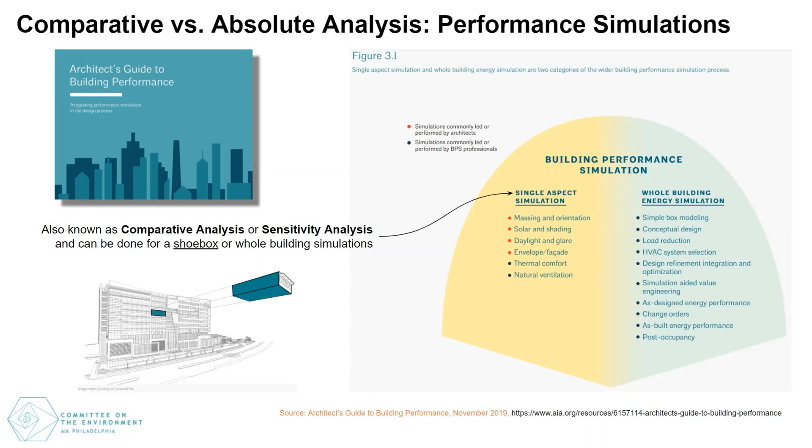So again, this is our charge as architects to implement these lessons. So, getting into and setting up the presentations for tonight, we did talk in our early sessions this year about the difference between comparative and absolute analyses, the types of simulations that you're going to look at early in a project: climate insight, programming, benchmarking, how you can ask those questions up front.

And then as you start to get into developing your design, using these tools to go through iterative studies. We'll see some examples of those tonight as well. And even before systems are selected, and then as systems are selected, kind of integrating the whole building together, determining your load, determining the impact of all of your early design decisions on setting those loads.

And then finally, as we're going to focus on more next month, verifying the as-designed performance as you get to the later phases of the project, as you get to perhaps submitting your LEED energy model, those types of exercises. So we talked amongst our group about the questions we wanted to ask in these presentations. What questions are you asking as a designer, and when is the right time to ask them?

How do you identify the parameters that are going to be most impactful to your project? Maybe there's some obvious contenders. And then as we get into the outputs of these studies, what does that data tell us? How do we use it to make design decisions? And again, in the comparative frame of reference, we're looking at how those decisions create differences between the schemes. Not so much what the exact number output is, but what the relative conclusions are from those comparative studies.

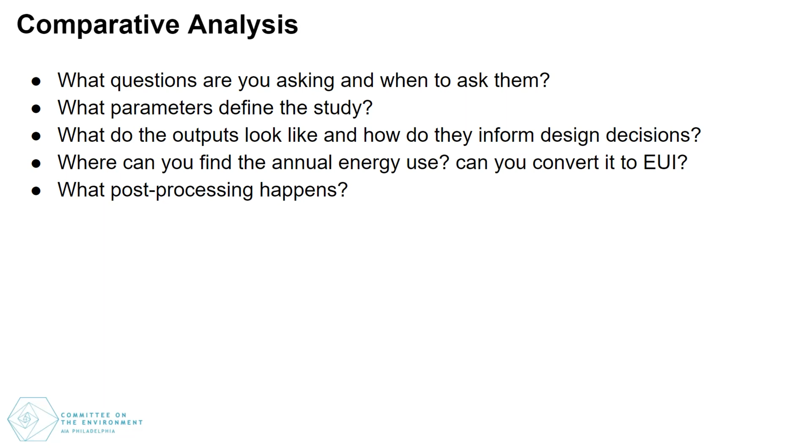And then as we get into the more developed schemes, how do we evaluate the energy use, look at reporting to the 2030 Commitment to the DDx, and evaluating this data at the end of the process. So that leads us into our presentations, and we asked around, and we had a couple of our members who were interested in presenting different tools. We have Sherman Aronson, who's a regular member of our committee, who is going to be presenting some of VLTA's earlier cove.tool evaluations.

How that tool can be used to ask some of these questions, make some of these decisions. We have Daniel Overby, who's joining us from Browning Day, who's going to give a demonstration on Sefaira, how these kinds of investigations can be pursued, and then Apoorv Goyal, who's also been a regular member of our group this year and contributed to a couple of our presentations, and he's going to be doing the same on Climate Studio. So I think a good range of tools, a good range of approaches, and with that, I'm going to go ahead and get into the talks.

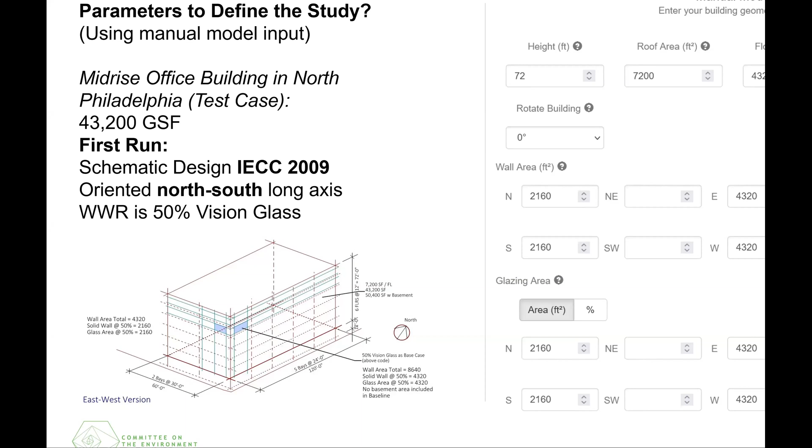And Sherman, I will pitch it to you if you are ready to share. You're muted there. Okay, yeah, let me share screen. I'm going to stop. Oh, okay, I will do that again. Let me put it on full screen. There we are. Okay, that looks a little big on here. It seems to fill up a little too much there. Well, can you see the whole image? Yes. So that's better.

Yes, we learned about cove.tool at one of these sessions earlier this year and late last year, and for a long time at VLTA, we've tried to use various kinds of plugins, Green Building Studio for a while with Revit. We got way too much information and variables from that, and it was hard to pick and choose. We tried eQuest, and we could get through a little bit of it, but not all that far. So this summer we decided, after some experimenting, to get a few licenses with cove.tool and see if we can use it for energy and for the other aspects of green design that are built into it.

So I'm going to show three very brief building types and building examples. This first one is a small, medium-sized office building. It's kind of imaginary for the cove.tool study, but it's based on a recent project we completed a few years ago. And the way to enter the information in this case was very simple.

I made a sort of hand drawing on Bluebeam of a volume of a building and assigned 50% glass areas, and made a rough sketch, and then put that data manually into the program. So in that sense, it's a little bit like ComCheck. It's just basic information on the envelope.

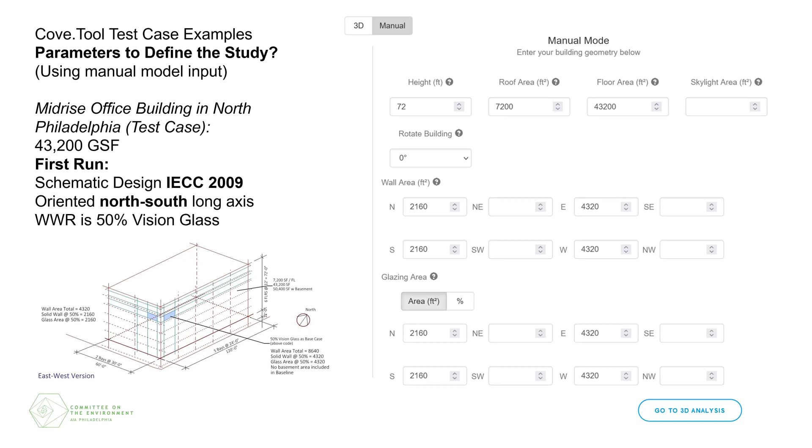And we chose the 2009 energy code, and we had it oriented east, so the long sides were east-west, actually, and it was 50% vision. But let's see what happens. And so the next slide, we get those questions asked. What is the projected energy use? How it's based on massing and orientation, window to wall ratio, the version of the code used,

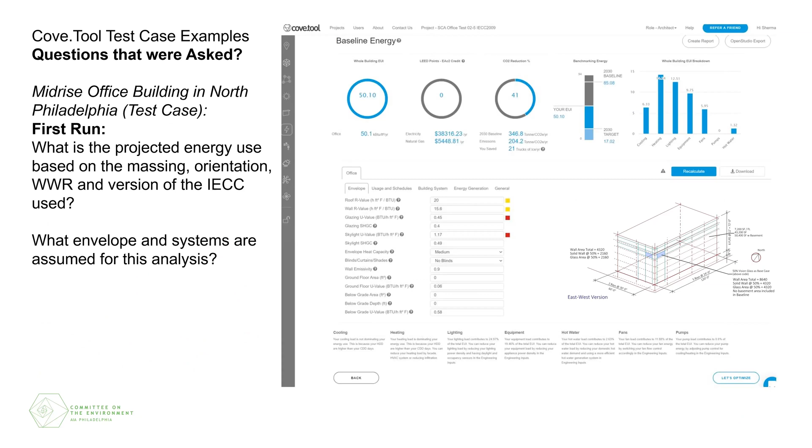and we got some answers. Baseline energy of 50, and it shows it's sort of mid-range between national average and the DDX targets, but that was very useful information. And it shows a report where you can read the output, you can interpret it, you can understand it pretty clearly. It does include the PEUI right away.

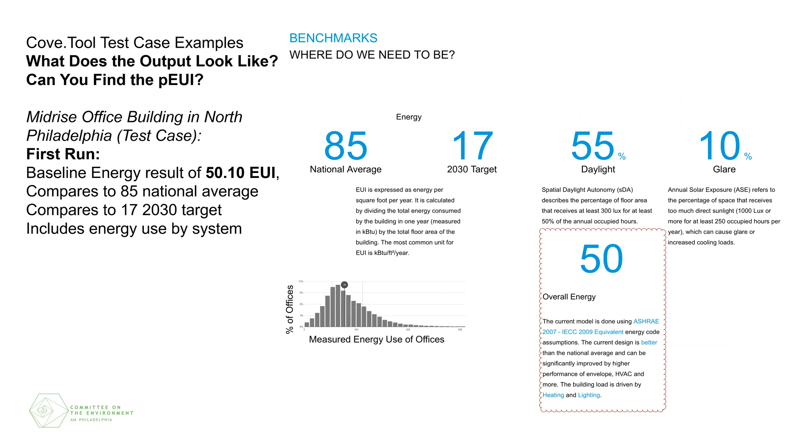So then we made a stab at adjusting that building design, making it so the long sides are facing north and south, reducing the window glass area to 40% on those sides and 20% on east and west. And we updated it to the 2018 code and ran it again.

And there we get a PEUI of 30, which is a dramatic improvement over the previous results. And it's about 67% less than the national average of 85. And if we were submitting this, we could use this data for DDx reporting. And you could read what the assumptions were for envelope and glazing.

So pretty much what it's working from is standard R values and U values that are built into complying with the code and glazing values. And that extrapolates a good deal of information from that. Also, systems, basic system assumptions. Any of those you can adjust and tweak and change.

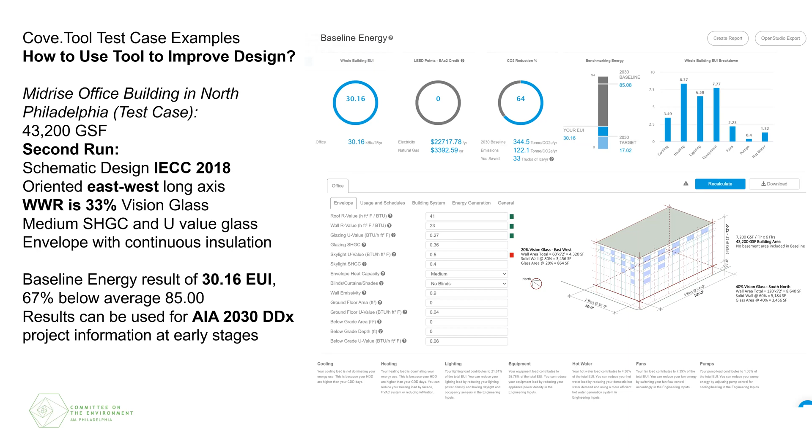So next step is optimizing. And it has a tool built in where we can ask the question, well, what are the design options that we could explore if we want to reduce it even further from the 30 PEUI? And there's a range of options which can be fine-tuned. If you select one of these bars, you can just say 100 tons of CO2, or you could adjust the range based on the cost premium or the payback.

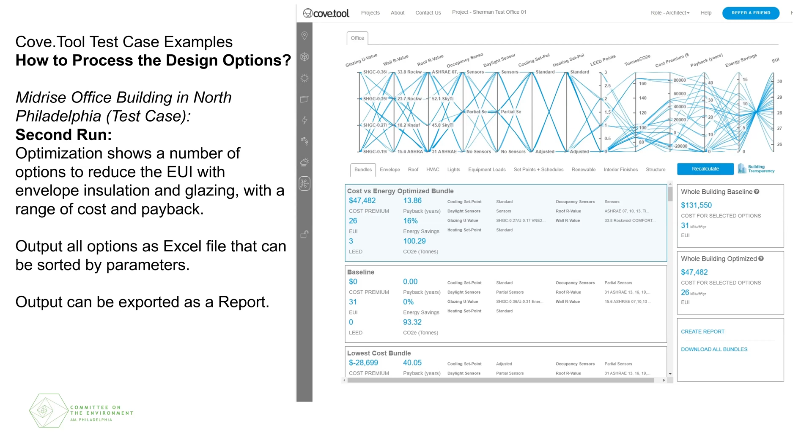So this provided a range graphically, this set of bundles, you can create a report, but we downloaded this as an Excel document. And then once it's in Excel, we can sort it by any of these parameters. So we decided to sort by steel framing, because we're not using wood framing, and look at what it proposes.

So here we went, it might be hard to read on your screen, but went from 31 in that bright yellow band down to 27.6. And one of the major changes is using improved glazing. We actually have a VNE number for a product, as well as adjustments to occupancy sensors, with very little additional construction cost. So this is a kind of tool that we can use during design to discuss with the engineers and the owners.

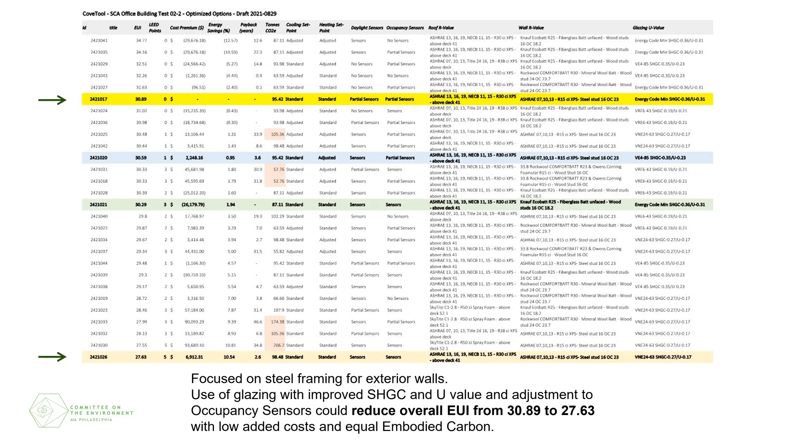It also provides graphic output on climate, sunlight, the psychrometric chart, radiation. That's based on the location. It's an output that varies with where you are and the type and size of building. So this is useful for other kinds of decision making.

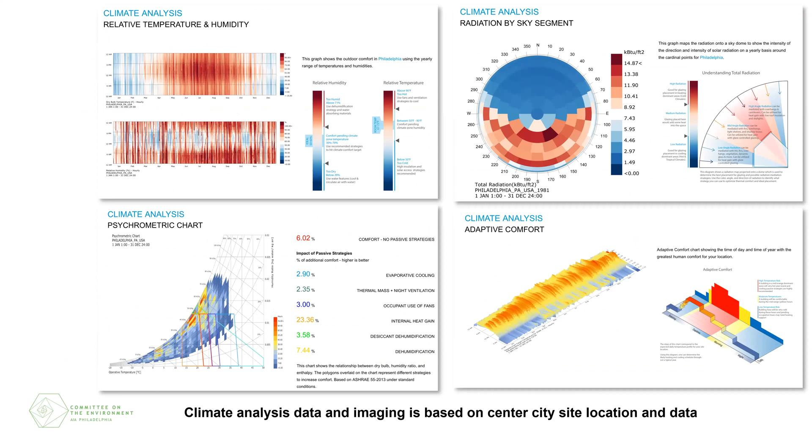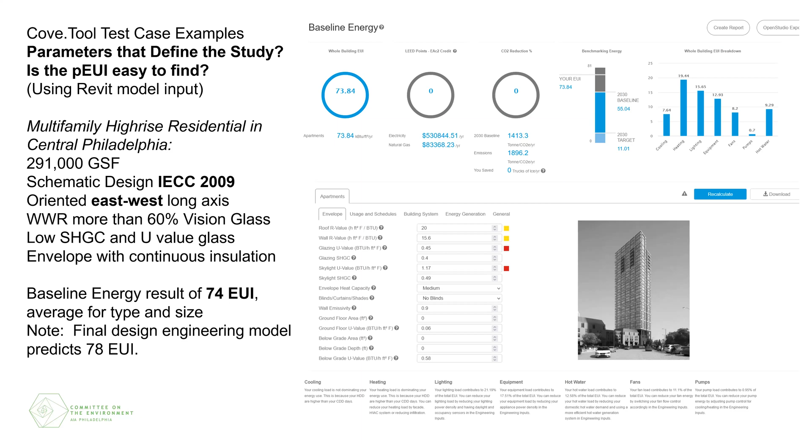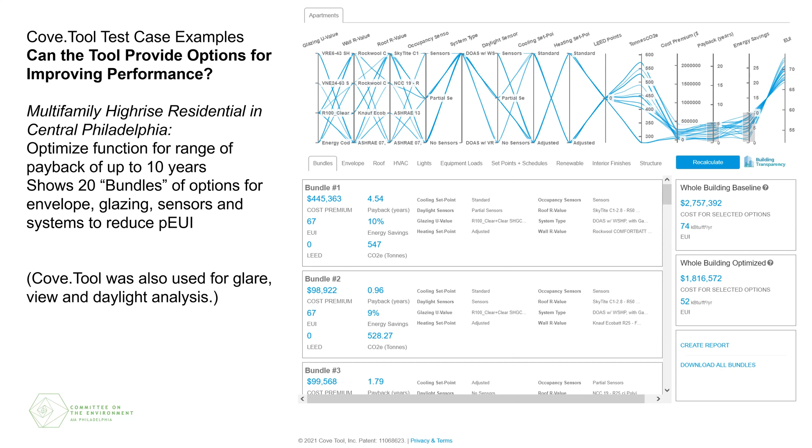And again, we looked at bundles of optimization options. There were about 20 or so that could be considered, again, mostly to do with glazing, since there's a lot of glass on the building facade, but there was significant added cost for moving from 74 to 52 PEUI, for instance. But if we could dig into it further and look at the variables, there may be other options to consider as well. We also used the tool for the owners who were interested in a study of glare, view, and daylight analysis, and that was helpful as well.

And the last mini case study is a mid-size multifamily residential project, large but lower rise and newer. So it's still in concept design.

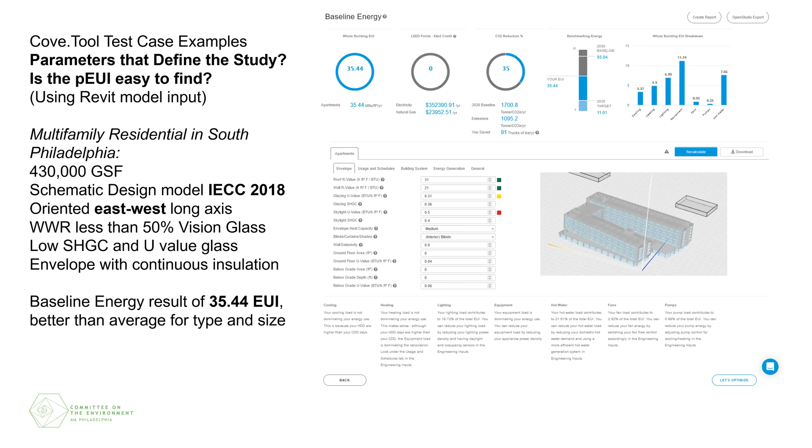And what parameters do we have? Well, here again, we're complying with the 2018 code. It's mostly organized with long views on the north and south walls, and the window-to-wall ratio is less than 50%. In fact, they're targeting 40% with high-quality insulated solid walls throughout. And this gives us a prediction of 35 pEUI, which again, is easy to find. It's front and center in the presentation.

And then we ran an optimization where we can continue to look at possible improvements to that, but that is a very good result for this kind of building for today's market. There are some improvements that could be made to reduce it to 31, which is like a $1 million cost premium worth evaluating, and to see what else we can do with it.

But this is the beginnings; we've only been using it for a couple of months. We're starting to use this tool in early concept planning. And I have good hopes that it will get us to a point where our architects can understand the variables involved and the terms, and be able to then talk with our mechanical engineers and civil engineers to get a better handle as they move forward. It shouldn't be that far in a discussion.

And also, in a way, it is, like I said before, a bit like COMcheck. It is reachable for basic information, not an in-detail model, but good enough to get a lot of insight in the beginning of the project. So that's where we are, and that's what we're sharing today. Okay, I'll unshare the screen.

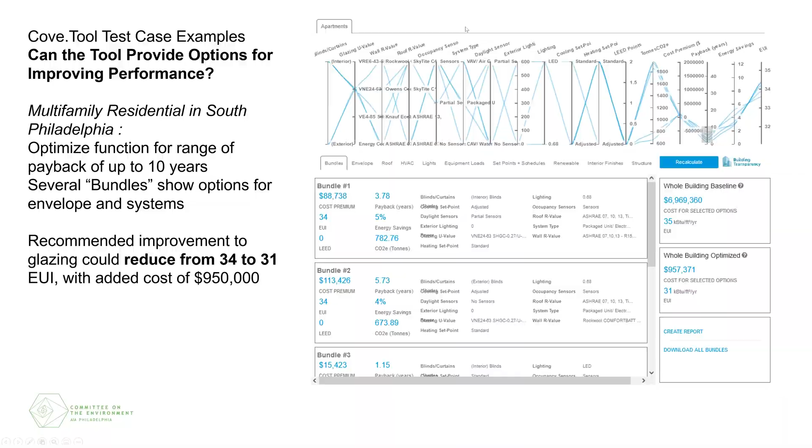Great, thank you, Sherman. I think that is a great illustration, and your point about how these tools can educate architects on the impacts of these types of variations and options is an important point, and part of why we're highlighting some of these tools. So with that, Dan, I'll let you go ahead and share your demo on Sefaira.

Okay. If you can see SketchUp on the screen, then the screen share is working well. I'm going to try to share a few different things. I was telling the group offline before we kicked off, I should have done what Sherman did and shown prepared slides so that fewer things can go wrong. But I'm going to be a little bit wild here and give you a live demo of Sefaira and hope that everything works out perfectly. I was with many of you earlier in the year, and we talked high level on some of these tools, so I thought we'd just jump in and try this out.

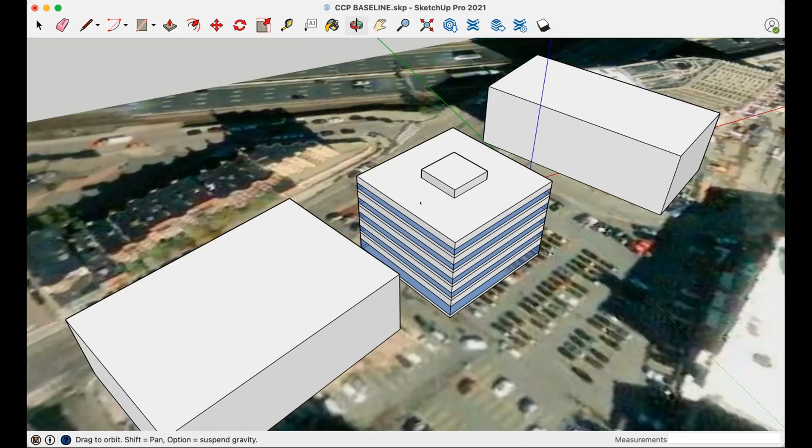So what you see here is SketchUp and Sefaira. That energy modeling platform is also cloud-based, just like cove.tool. In order to access the plugins, you have to go to the Sefaira website for Revit and SketchUp. They have their own respective plugins. You install them, and if all works well, you can see my Sefaira plugin menu box appearing here.

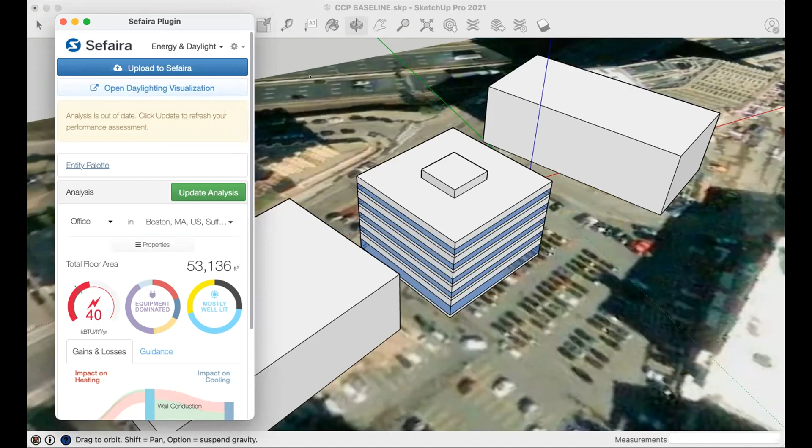So what I have modeled here for you is a 5-story office building in Boston, near Fenway. When you open up the Sefaira plugin, it's going to want to interpret whatever is on your screen. So if you don't want, let's say, the 5-block area that I have highlighted here to be part of the analysis, turn that off. Sefaira is going to take whatever you're showing. And you can see here, I've reduced this model down to very simple planes.

In this first menu box, I'm going to go to Entity Palette and click Show Entity Types. You see this list of different types of enclosure components: roof, floor, walls. It's very simple. You get one type of opaque wall, one type of floor, one type of roof, and you put in values for those.

As you can see here, it's a very simple diagrammatic representation, but this is the Sefaira plugin operating live in SketchUp, telling you what it thinks each component of your model is. I've got the nearby adjacent structures identified as shading, so for solar access it's taking that into consideration. Thankfully, you can see my roofs are coming up as roofs, my walls as walls. This is fixed glazing.

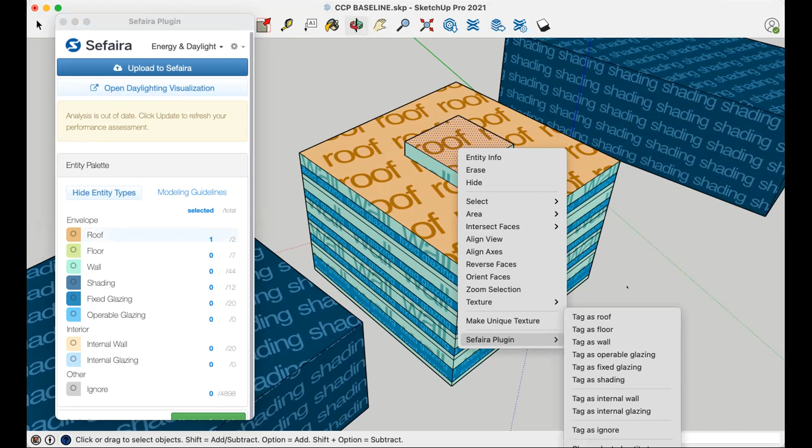And if you wanted to change one, let's say something came through and it didn't look right, you can select that surface, right click, go down to the little plugin menu that'll pop up, and you can just assign it as something else. I know getting your architectural models into these cloud-based modeling platforms is always the most bewildering, labor-intensive part of the entire process. The fun stuff is once you have it in there, but what confidence do you have that it's being properly interpreted? Here's how you can check that.

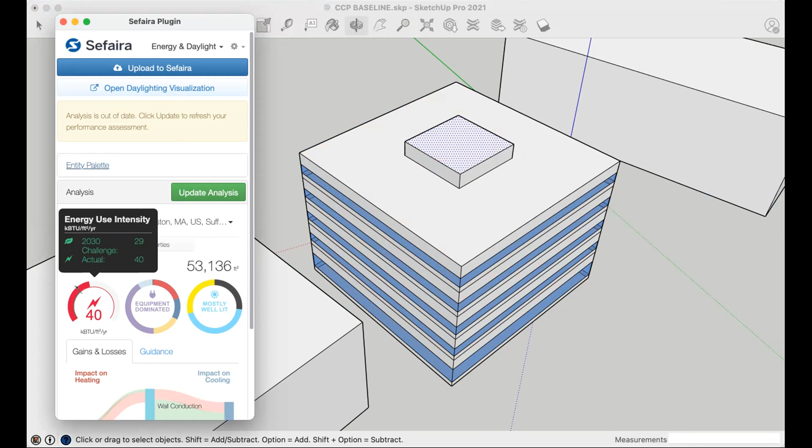So I'll hide my entity types and hide my entity palette. And you can see here, I've already set the analysis to go. I could do it again here, but it would take a few seconds. It'll give you 3 dials. It does some within SketchUp. It'll take a very quick, simple analysis of your EUI. In this case, it's 40 and it has your 2030 target. It's going to give you a very quick breakdown of the load profile. And that's because I selected office and I selected Boston, Massachusetts.

It automatically pulls in the climate data and load profiles for an agonizingly simple list of building types. Most likely your buildings won't fit nicely into one of these categories. The thing about Sefaira, sort of the best and worst part of it, is it's simple. It's simple to access, less knobs and levers, and that will frustrate at times, but it makes it very easy to get into.

This is looking at the daylighting in my floor plates, and it's telling me what percentage of the floor plates are well lit, overlit, and underlit. You can go down here to some additional guidance. It's going to tell you the impact on your cooling load and the impact on your heating load. Okay, I can look at this and say, well, my south glass is going to give me some solar income, and that's going to help my building, right? Well, it does have a benefit on your heating, but look at the deficit: because it's a glazed component of your enclosure, how much of an impact it has on cooling.

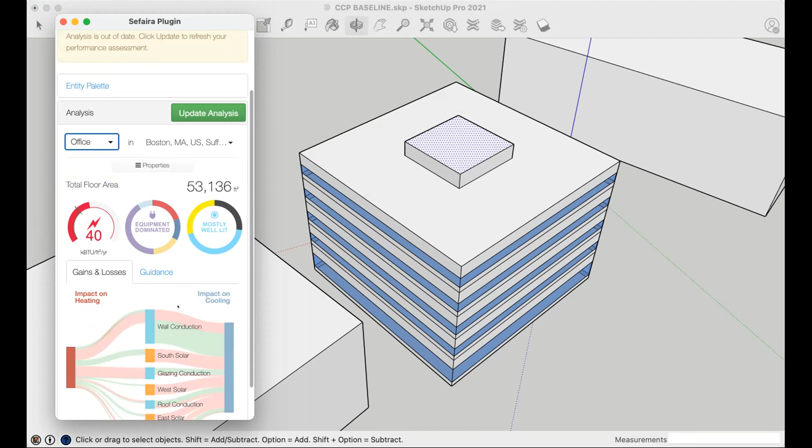So very quickly, when you hit this update analysis, within about 30 seconds you get this richness of data. It's really quite amazing. You can just iterate, model, push, pull, twist, iterate. You can just keep hitting that green button. It's going to give you new numbers. And that is one of the best things about it: before you even get into the cloud, you can do some of this. Open the daylight visualization tool. Whatever view you have set up in SketchUp, that's what it's going to assess.

And you can look at daylight factor. It sort of has the last 3 generations of daylight metrics. So it has your daylight factor. It'll give you your spatial daylight autonomy. It will also give you annual sunlight exposure as well. So the glare metric, you can look at just straight up illumination, and it'll give you a nice gradient, almost Ecotect-like for those of you who've been using these tools for a while. It'll give you this nice colorful gradient that you can then export and use in a presentation.

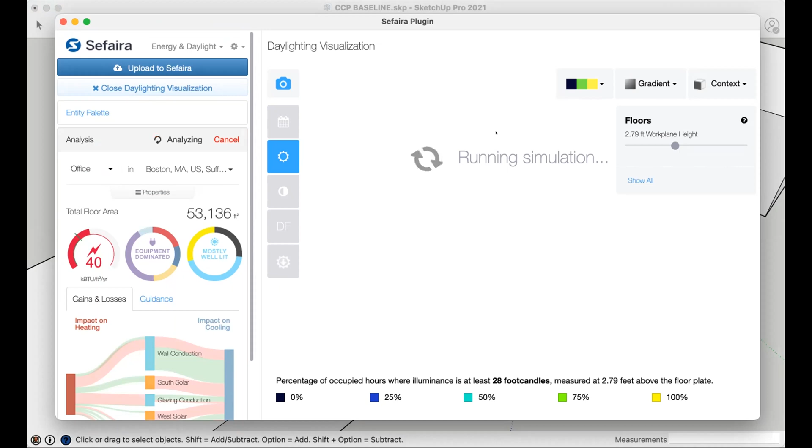But as I'm talking here, I don't know if I'm going to get it in time. So I'm going to keep moving, and maybe I'll come back to this while it's baking. It's running some really complex algorithms in the background here. Because time is limited, once you are ready to go, you hit this upload to Sefaira button. Oh, there you go, right on time.

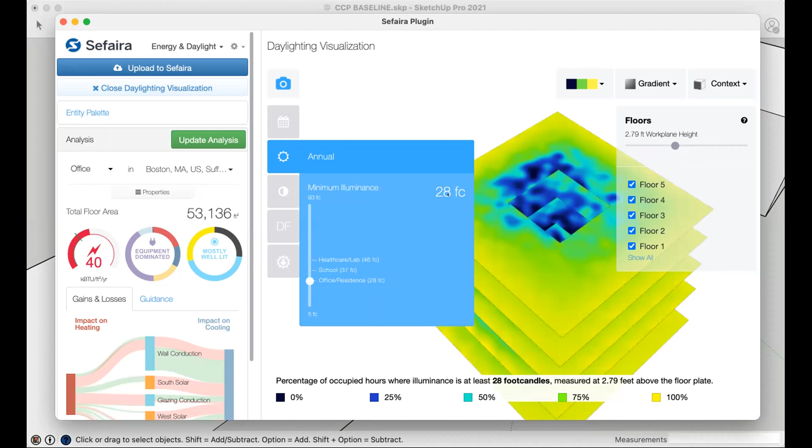So this is giving me, based on this scale at the bottom of your screen, hopefully you can see that, a work surface height, 28 foot-candles as the threshold, and it's looking at the amount of my floor area that is receiving a certain percentage of lighting. So this is going to be set based on whatever you establish for your spatial daylight autonomy. So you can get into these metrics. I'm going to close this visualization tool.

If you were paying close attention, you would have seen that my EUI was 40. I imported it into the cloud. It's looking at things with a different level of granularity. It's making some slightly different calculations. It's just a bit more specific. It came up with 41 in the cloud.

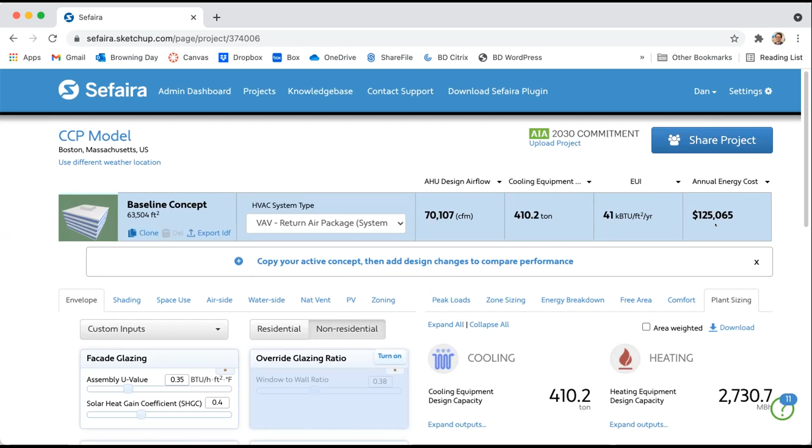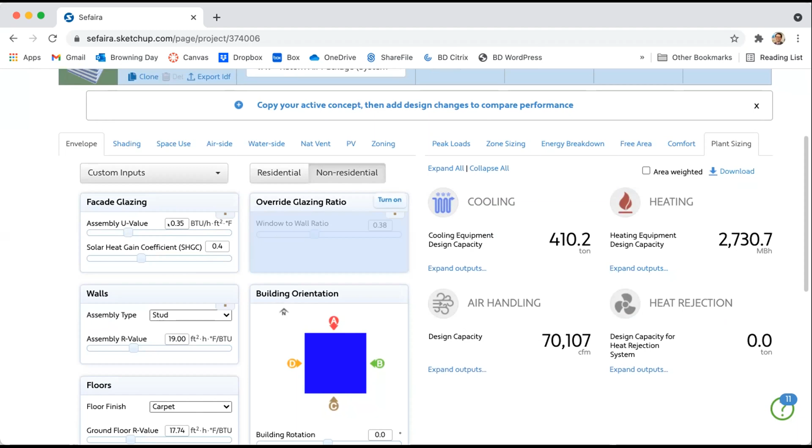You can go to these tabs and you can start to dial up. It's going to bring in from your SketchUp model whatever you had input there. I did not show you where you can actually shift little dials in that SketchUp menu item where you can actually adjust your wall insulation levels, your infiltration, some things like that. Just about 10 different things you can dial up and down, but you can pull it right here into the cloud. So here you might wonder, okay, infiltration, what kind of an impact could that have?

Every one of these variables comes with this little icon. You see it right here, this little blue and red icon. Actually a good one is, I'm gonna pick roof insulation. So let me find my roof R value. This is always a good one. I'll pick this response curve. I'm going to set it.

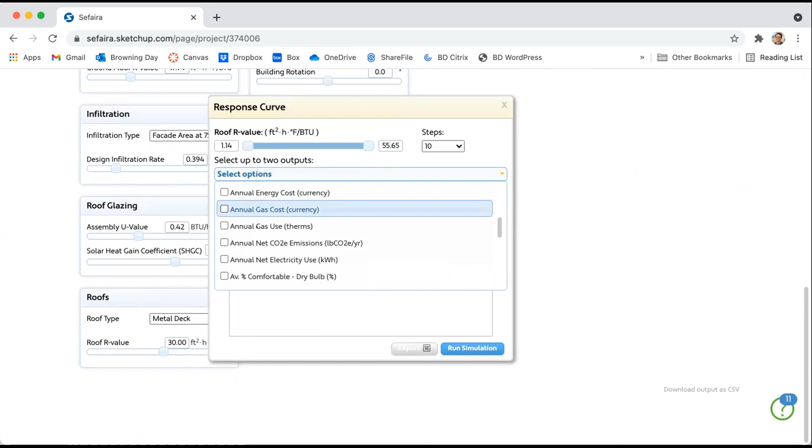Okay, so this is looking at R1 versus R55. You can change this to whatever you want. 10 steps. So it's going to run 10 different models in the background. And I want it to give me an idea of what that might do for my, let's say, annual energy cost and EUI. So I'm going to select these two metrics and I'm going to hit run simulation.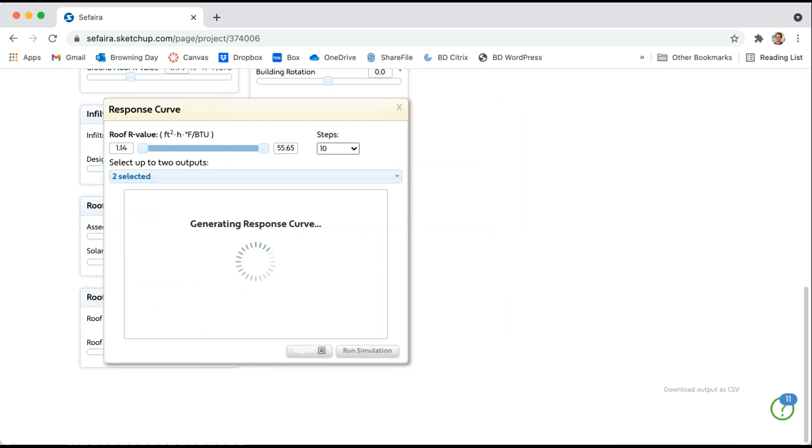And just like with the daylighting, I'm going to hope that the cloud is cooperating here at 6:09 Eastern in the evening and that they're not overtaxed. And I'm going to get this nice response curve where right now in the cloud, Sefaira is running no less than 10 different iterations of my model, taking basically the 10 even increments between the lower end of my spectrum and upper end. So between R1 and R56, let's call it. And it's going to show me what the impact would be on energy cost and EUI.

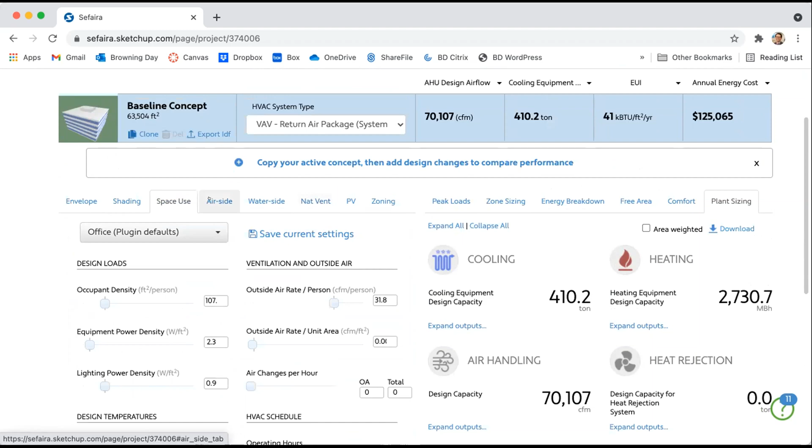And while that's running, I'm going to go up here to the top and you can go through and you can select shading. You can look at different things. And I think I just got rid of my response curve. So space use, you can get into some of the mechanical things, air side. You can get into water side. You can add PV if it's on your project. It's going to give you also, as you run each one of these iterations, a lot of basics about your mechanical systems. You can change your mechanical systems up here. It starts me off with the ASHRAE baseline based on my location, climate zone, etc.

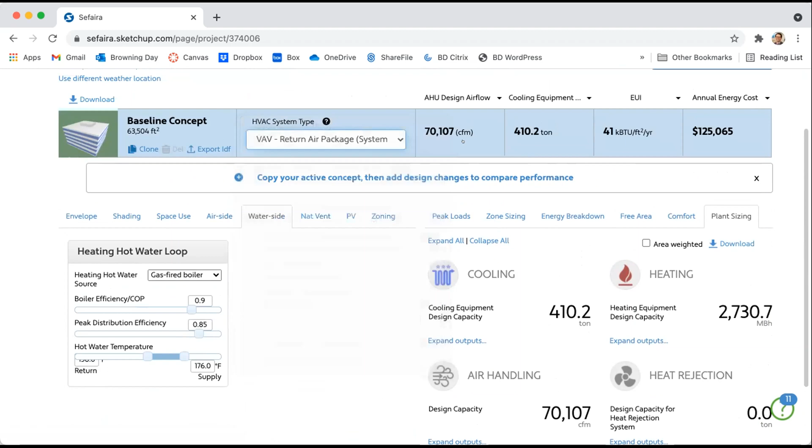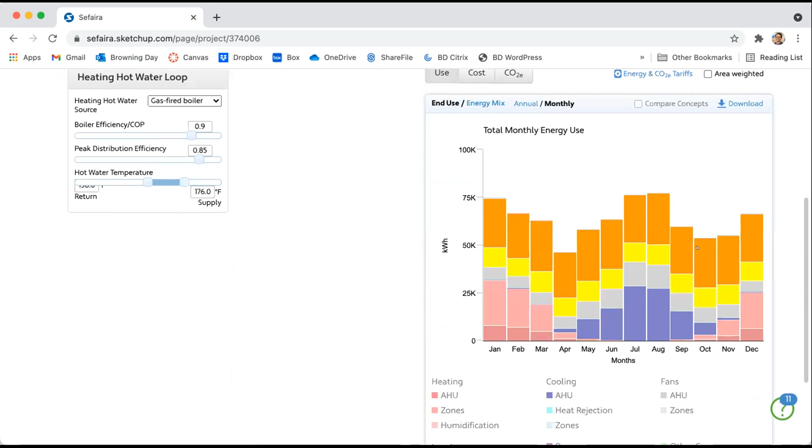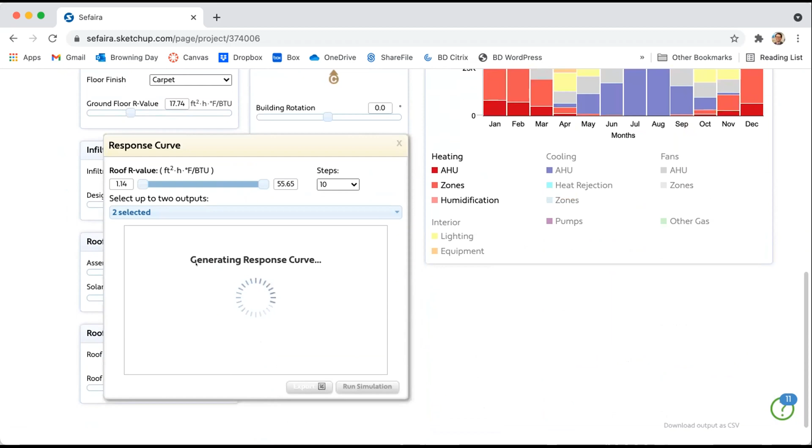And it's going to give you what you would expect to see in terms of annual, monthly breakdowns of the different ways in which your building is projected to use energy. Now, again, keep in mind that it's making a lot of assumptions, based on what you select for your system types and these envelope enclosure pieces. But if this works out, okay, it's still running my response curve in the background. I'm hoping this will show up because if this shows up, you'll see one of the more interesting features of Sefaira. There it is, great.

So this little green dot is the R30 where my project currently stands. It's just a little bit short of that actually. It's right on it. So you can see the diminishing return of increasing R values. So I had this happen to me on a job today where a developer was asking, can I increase my roof insulation? Will that help me get another LEED point?

Well, we've all had that day.

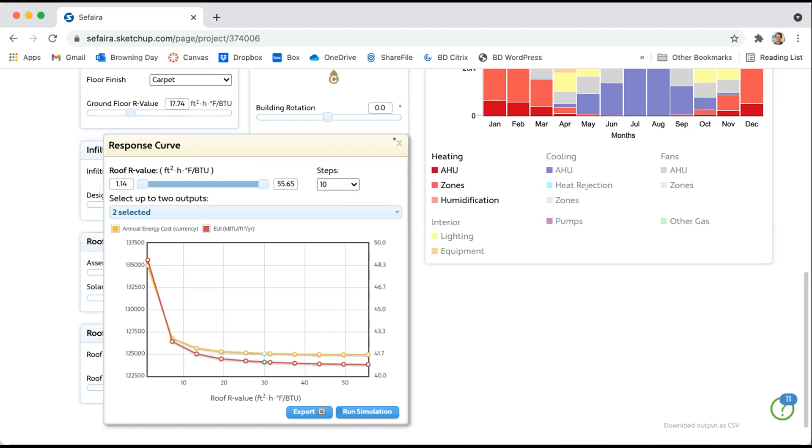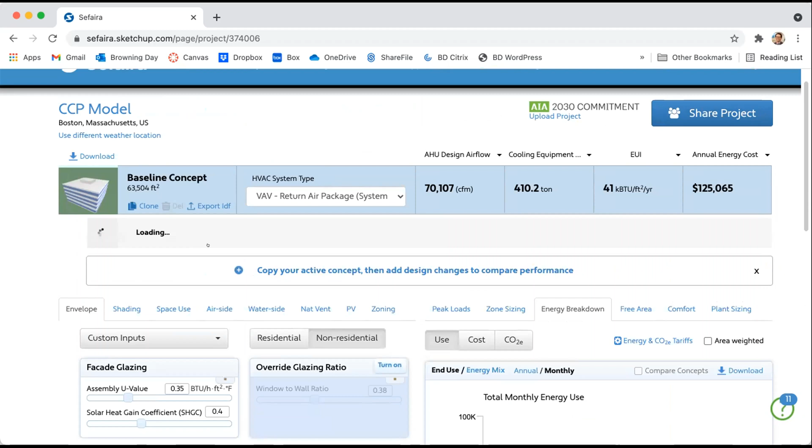You can vary about anything with your project, the orientation, glazing ratios, system types, and you'll have this baseline here. You can copy it, make another iteration. You can make a dozen different copies of your model, change whatever you want to change about it. So the big one, see how it got big there? It says clone. I can clone it. I can change anything I want, hit go again. It's going to give me a direct comparison.

And when you find a model you like, have it selected, and you can upload the project straight to the 2030 DDX, and it'll pull all the data on your project directly into there. It uses the API provided by AIA for the DDX. That is way too many acronyms in one sentence.

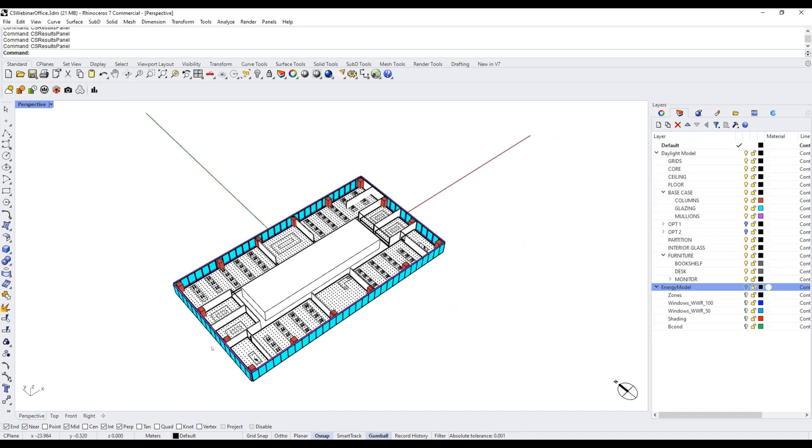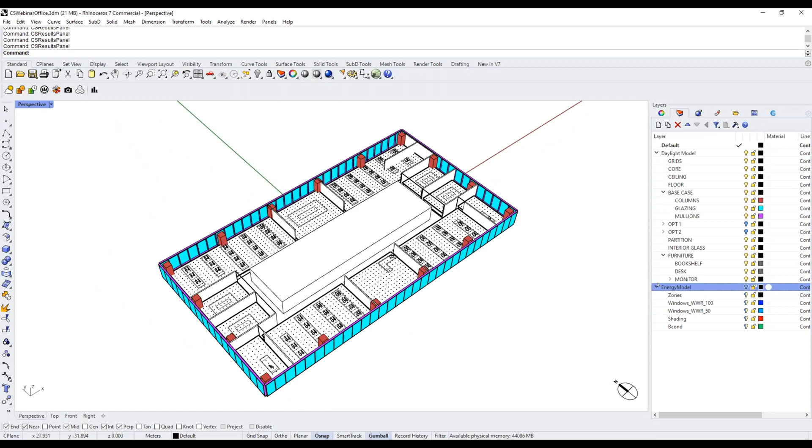Okay, perfect. So instead of picking up a case study, I just picked up a random sample building that Climate Studio had. And I'll go through three topics very quickly: daylight, thermal analysis within Rhino, and then thermal analysis within Grasshopper, and just give you a feel of how the results are visualized. I'll try not to do a tutorial, but everything in Climate Studio works through layers.

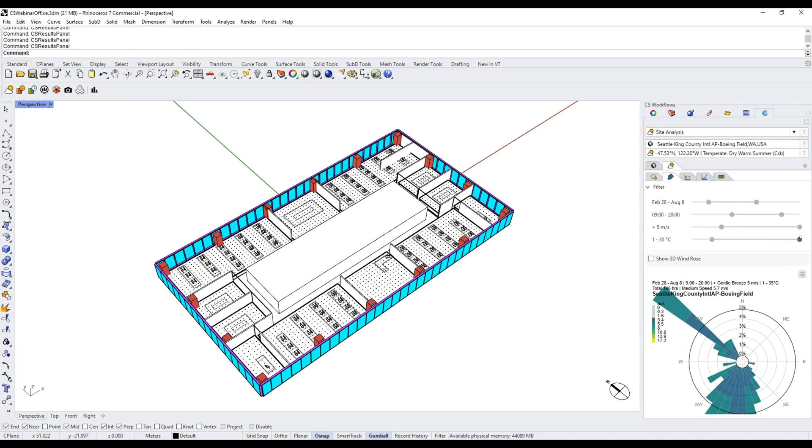A great feature of Climate Studio is that once you select your weather file, you can visualize the climate information really quickly. Just what kind of wind situation it is, and look at a specific time of the year or time of the day. If you want to see where the strongest winds are coming from, what temperature profiles those winds have, you can look at the diurnal temperatures, the hourly temperatures, mean temperatures over the day, over the month, which again is really helpful when you start the conversation with the client.

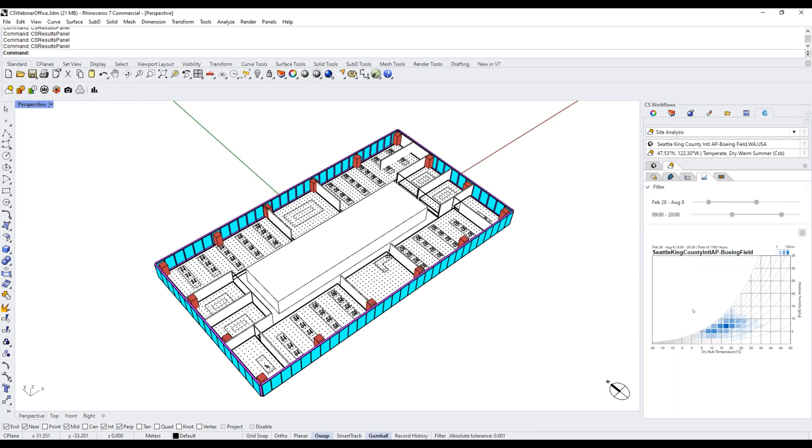I love psychrometric charts. It gives you a good perspective about passive design and what kind of strategies you should implement.

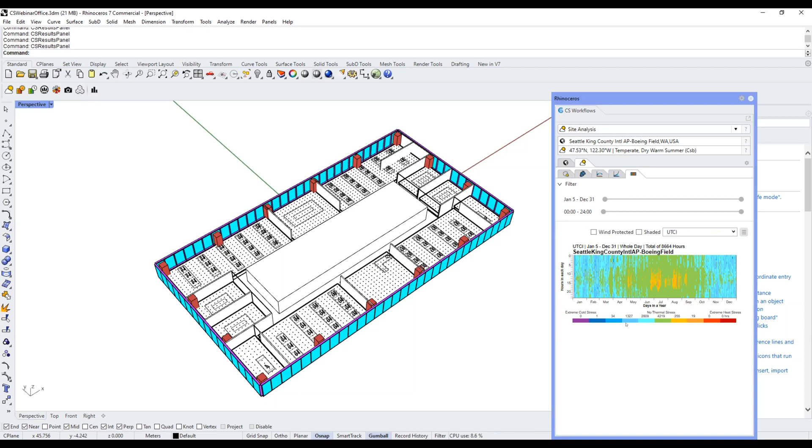Another interesting thing is, this is probably not looking the best also because of this part, but you can also do a heat map of various metrics, and things like UTCI are really interesting and important when you start looking at context and facades and things like those. You can filter out the results and things like those again.

But then the good part, and I've already pre-run some of the simulations so that we can just talk directly about the results itself. So you have your Climate Studio toolbar with different analysis types. You can do a site analysis, as we just talked about. You can do a lot of daylight analysis, point in time, glare analysis, daylight. You can do your radiance rendering.

You can also do radiation mapping, which is great very early on to understand shading and mutual shading and things like those. You can also do view analysis now within the software. Both the daylight and the view analysis will give you a set report that can be directly submitted to USGBC as a LEED submittal now. So I think that's a really good feature of Climate Studio. And I know that the daylight report at least also replaces the whole Excel workflow on LEED Online, which is a lot of time saved, especially if you have a complicated building.

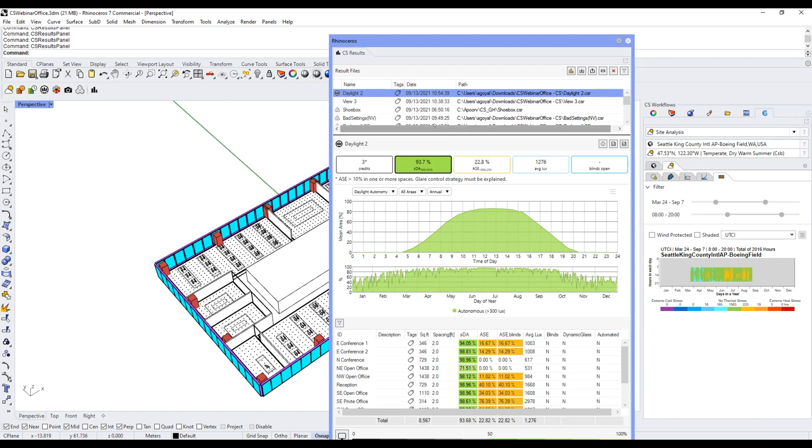So again, I have a very simple office layout. For example, you have some workrooms, you have some conference rooms and things like those. And when you run your daylight analysis, this is how it looks. It shows you how many credits approximately you're getting. This is run for LEED version 4 daylight option number 1, so sDA, and not 4.1, but gives you what your spatial daylight autonomy is for the entire building or for the entire floor.

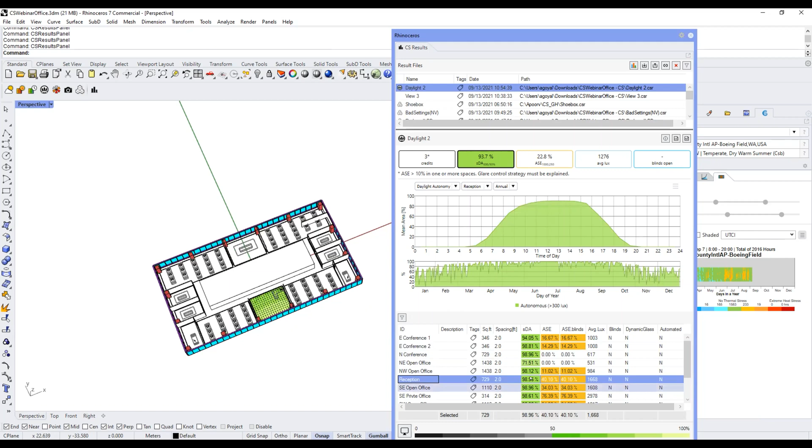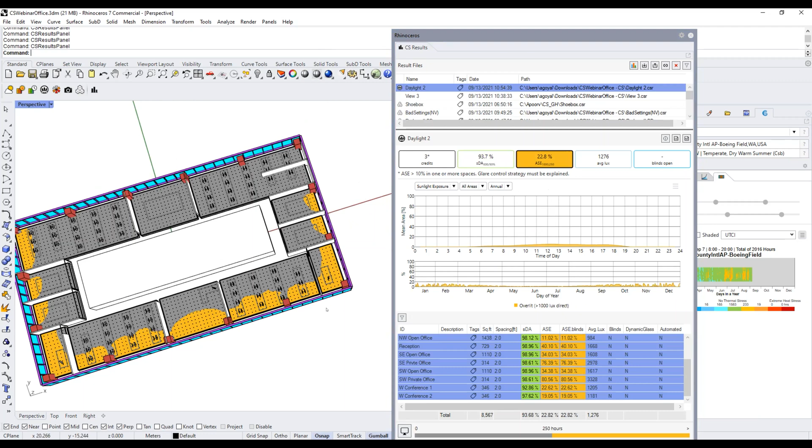You can also select specific floors or rooms or whatever, and it does give you a list of the same metrics by each space. You get annual sunlight exposure, which again is really important. It's debatable how. I'll not go into the metrics, but it tells you what's the glare potential, especially near the facades. So those things are really important when you're thinking of facade window to wall ratios, thinking about shading, for example, and also spatial layouts and things like those. It's a good help in that.

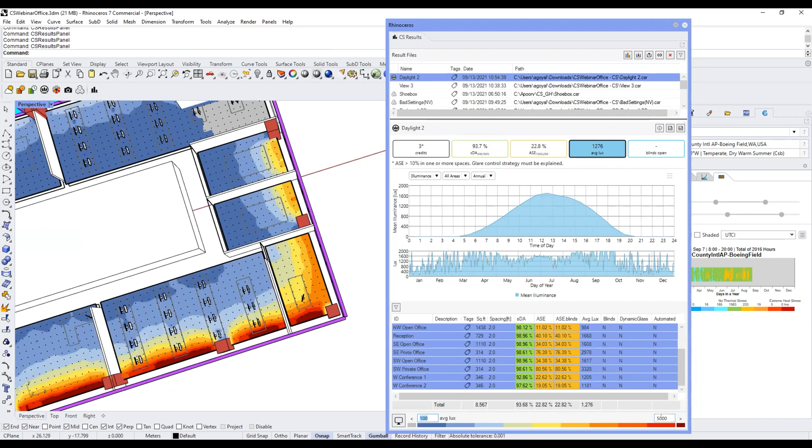You can get average lux out of it. So this is again very Ladybug, Ecotect color schemes that we are all very familiar with now. You have a great feature of setting what the high bounds and what the low bounds are on the lux levels. So it gives you a little bit more understanding of how things are working. You can also look at a specific day and then move the slider and understand how the sun moves.

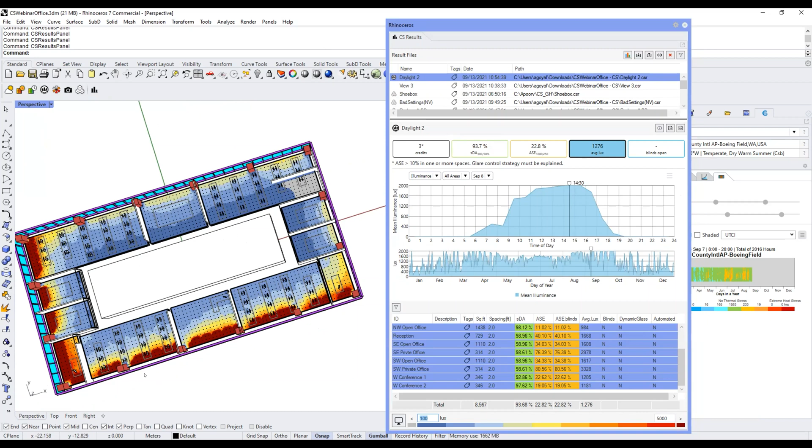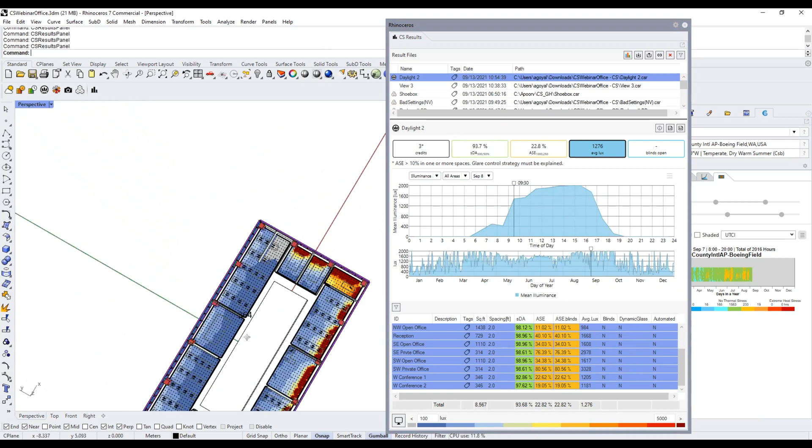So usually when we do daylight analysis, we go in and do these checks, especially to make sure that our orientation of the building is correct. And we kind of expect that, hey, this is the west side, so in the afternoon you would get more daylight from the afternoon sun, but in the morning it's more on the east side and things like those. So those become interesting and good checks for the daylight analysis.

You can obviously print a report here. It gives you, if it works, I can show you how it looks very quickly. Oh, I'm not sure actually if you will. Do you see a PDF pop up? Probably not. No, right? Okay.

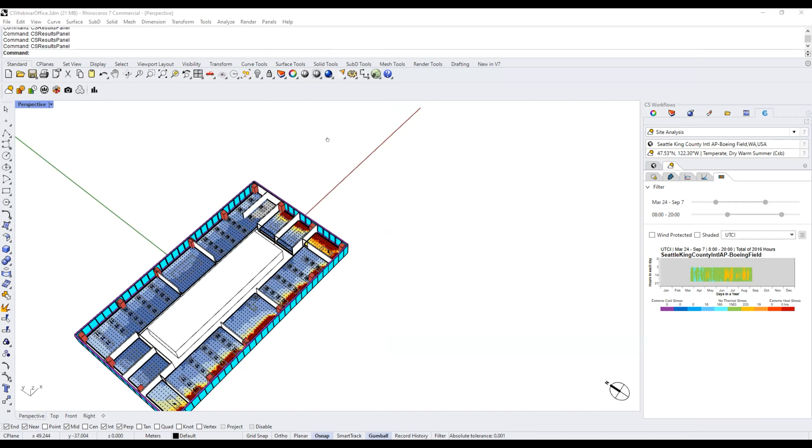I'm not gonna go into that, but it's a very formatted floor by floor report, giving you exactly these graphics in plan format and the ASE results, and then it goes space by space to talk about which space exactly is performing how well for daylight.

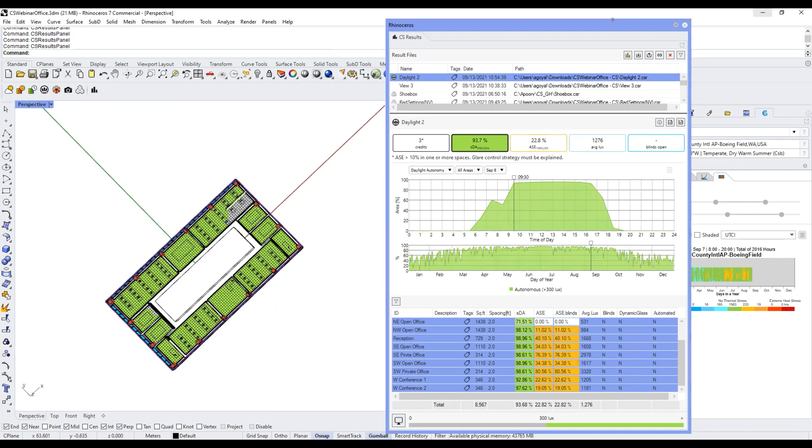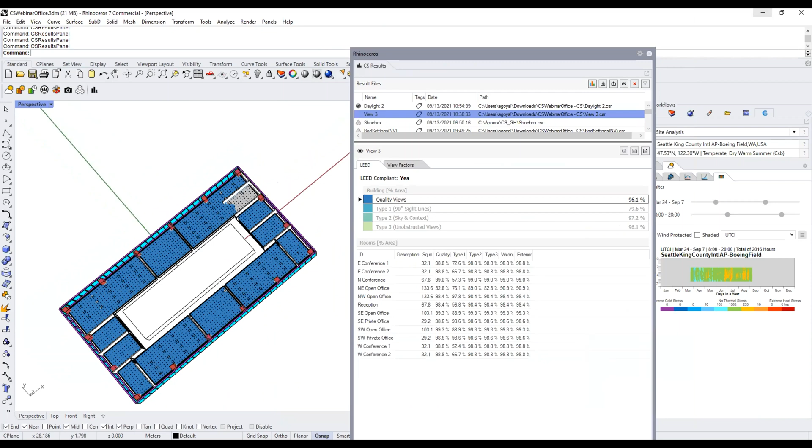And so the other thing that they are starting to add, it's still in progress, but it's already in the public release, is the view analysis. So this is again very well aligned with the USGBC LEED view calculations and the credit itself. This is a very simple room, but for example, if you have a space where there are no rooms, it calculates the 3 types of views and everything, and will give you a score on whether it meets the requirements or not.

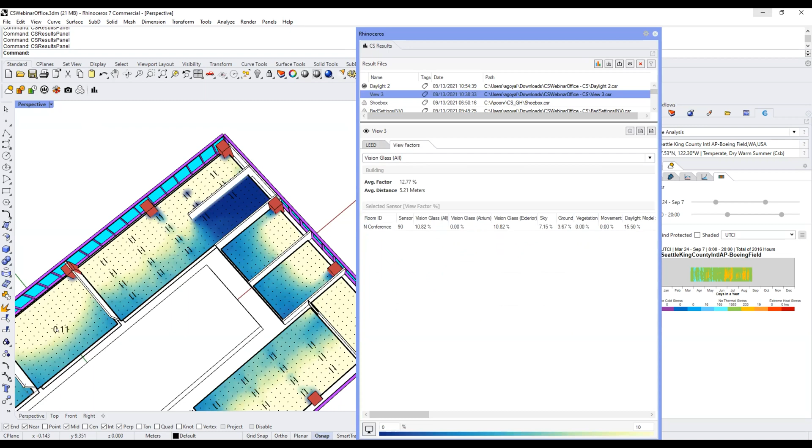You can look at the view factors based on how good or how bad the depth of the views and things like those are. I think it's pretty seamless. Again, you can get a PDF report directly out. You can also export data directly in an Excel format.

And then the good part also for both daylighting and view is if you click on the I button here, you do get what kind of materials you have applied and what the reflectance percentage and visual transmittance for that material is. And those are again really important QA/QC points to check.

As you all know, this is a daylight model, so it's a little bit more complicated. When you go into an energy model, it's a more single line, single plane model that we have to create within Rhino. Again, it works all based on layers.

1 second, sorry about that.

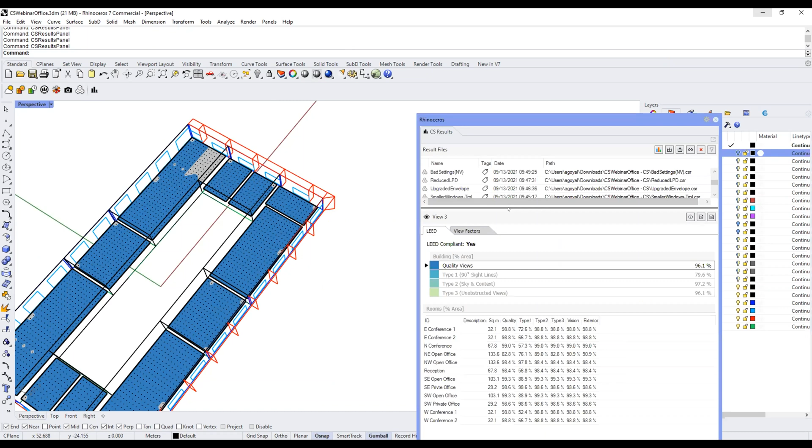I've pre-run some of the results and simulations so that it's easier to show and talk about this. Once you set all the zones and all the materials and all the zone properties and everything, and you run your results, this is what you instantly see. You see a site EUI, operational carbon in kg CO2 per square meter, and energy cost.

Again, Daniel, you mentioned these are all comparative analysis pictures and numbers. They are as good as the data you are defining, garbage in, garbage out. So it's really important to make sure that we define our input data as closely as possible. But even at that point, it's really important to see all of these simulations as comparative iterations and not anything else.

Climate Studio, within this window, again, this is all Rhino based right now, gives you a baseline EUI, which is basically the CBECS 2003 data, which is also the same data used for AIA reporting and DDx and the 2030. It will also give you how much percentage saved compared to that baseline. So that's your AIA 2030 score. I seem to be very good in this and saved 76%, but the idea is to save as much as possible and meet your 70%, 80% goals there.

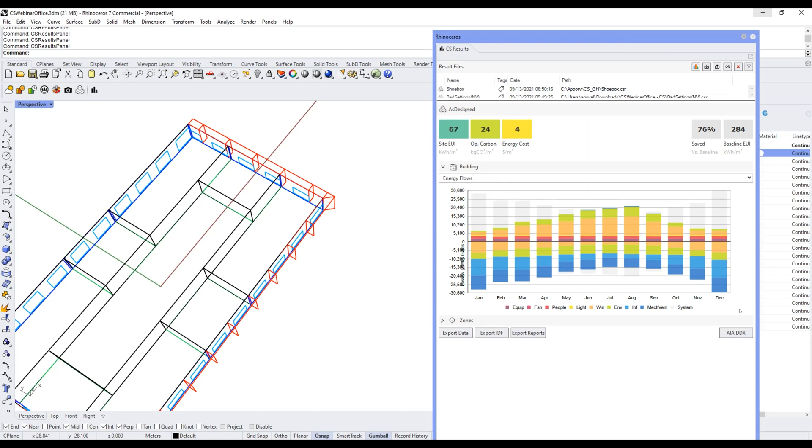In fact, I should have turned this off. Right now this one was a fully glazed, 100% glazed building, so you can see a lot of conduction losses happening through the windows. And so, for example, if you go to a smaller window proportion from here, you can see much lower losses through windows, still using the same window glazing assembly, which is the double pane glass right now.

The other interesting thing is the zone level information that Climate Studio provides. You can select any zone and start to get the temperature profiles happening throughout the year. It shows you a zoom in for a week, which you can select from here. That's really helpful to see that you've defined your set point for the HVAC at 26 degrees, for example, but your MRT is higher. So your walls are getting much warmer, and therefore your operative temperature is somewhere in between. Things like those become good checks to have.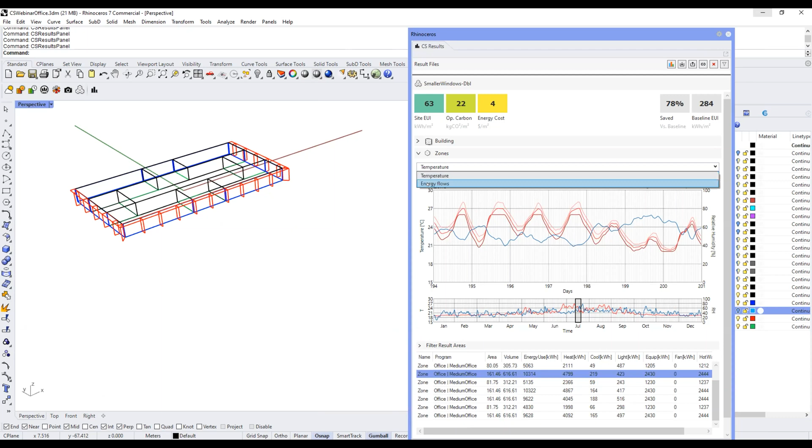You can also do energy flows within this. It's the energy flows diagram that I showed for the building, but now this is for each zone. So you will be able to see the difference between a north facing zone versus a south facing zone, for example, in terms of heat gain and heat losses.

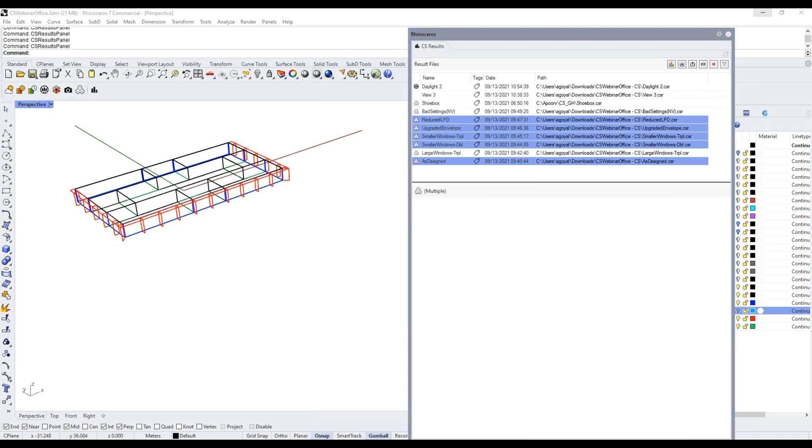So that's a basic idea, but another interesting feature of Climate Studio is that you can now actually select multiple of these iterations. And if you click on the compare button, you see something like this. Do you see a new window pop up with multiple comparative bars?

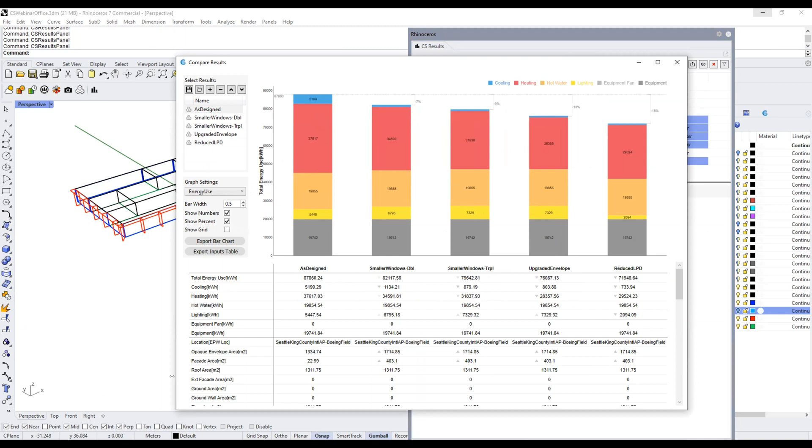Okay. So I really like this feature, this comparative workflow and visualization. It's showing you all the simulations that you added that you're comparing. It shows you the same bar charts and end uses, annual and end-use breakdown, but then shows you exactly what has changed, what has gone up. So I don't know if the gray arrows are visible, probably very faint, but any value that changes in any of these comparative analyses, you see either a gray arrow pointing down or pointing up.

The other interesting thing is that it also goes through the entire input assumption list, which is really important for everyone to check once you have run your analysis, just to make sure that whatever you're defining, again, garbage in, garbage out, that you're not in that trap of thinking that you have a single pane glass, but you're actually defining a triple pane glass and getting really excited about the low U-value when the engineering report comes in with a very high U-value.

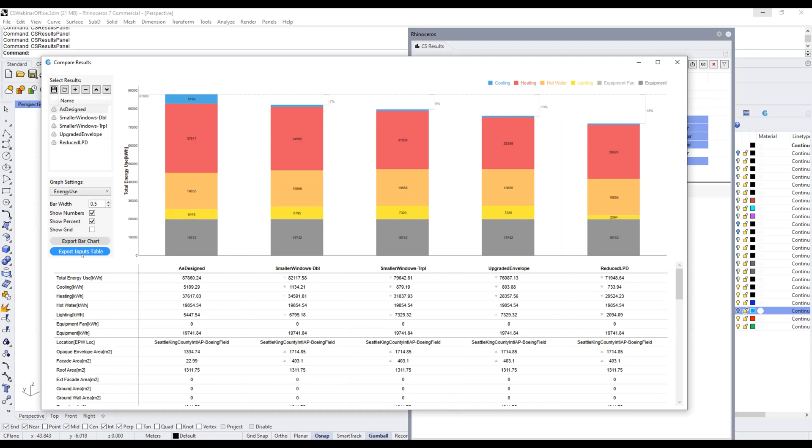So again, whatever you change, you will see a difference in there. And it's always compared to the last change. So for example, this is 0.59 because that's where I changed my double pane glass to triple pane glass. It also shows you a negative percentage reduction here on the top. You can export all of these bar charts and input tables as PDFs, as Excel files.

And if I go here, again, talking just a little bit about garbage in, garbage out, it's really important to know what you're doing and what to expect. So this is me going in and just randomly switching on natural ventilation for this building. And the results look like this, which don't make any sense at all, right? It can very well happen, but that's not the building you're designing, and that's not how you will be controlling it.

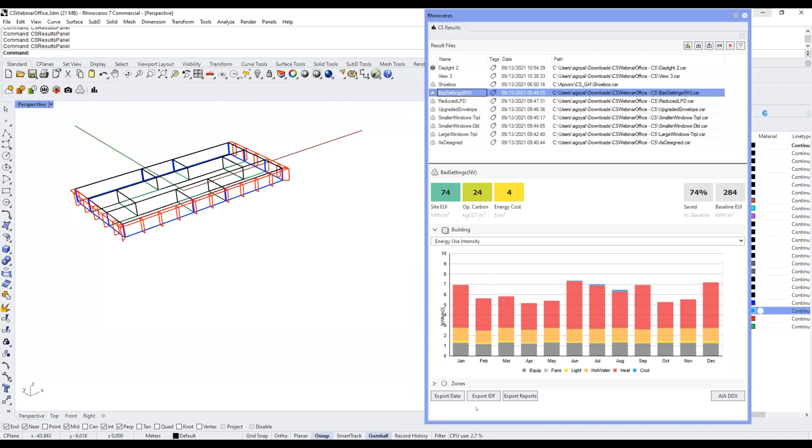So just an example, and a caution to always look at comparative analysis or comparative studies, and if you see something off, there's definitely something off. Double check. The last part here is that you can again export all of this data into Excel formats. The report is the typical EnergyPlus HTML report. The data is zone by zone, each metric being exported as raw data. You can also export the IDF if your consultants or engineers are asking for it, or if you want to take a look at what is really being defined and make sure everything is fine.

And then the last thing, which is great again, is you get an option of exporting this whole thing to AIA DDx. So you put in your firm key and your user key, make sure all the data is correct. And once you submit to AIA, sorry, I'm not able to show you the Chrome window here, but it will appear as a project, exactly the same information in the units that you are looking for.

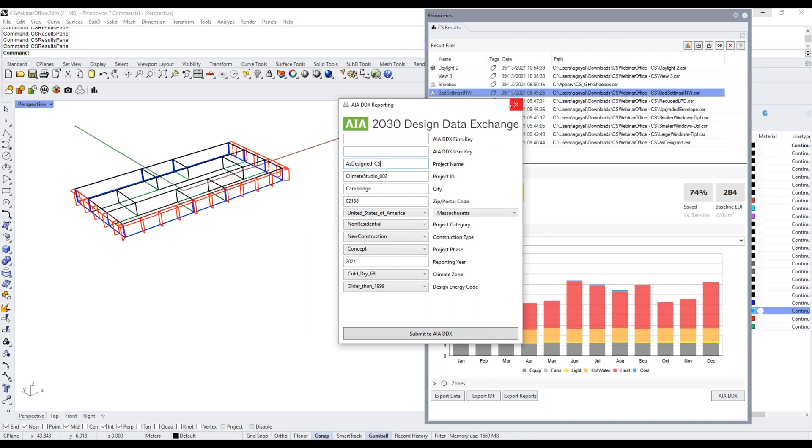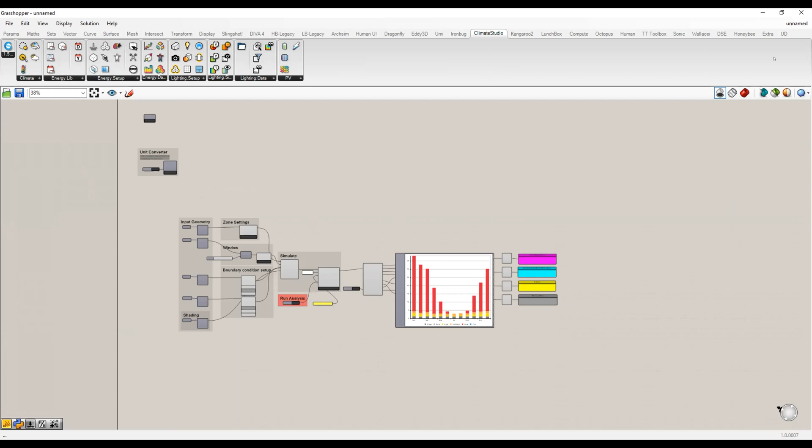The last part is a very quick thing: exactly the same capabilities actually exist on the Grasshopper side, which again I really like, because we are all in this world of excessively parameterized design, which also is great. You can link and do whatever you want with Grasshopper, have Climate Studio run multiple iterations overnight, or run as many iterations as you want. You can display everything in the same format within Grasshopper. So this is your EUI, but you can also do your energy balance.

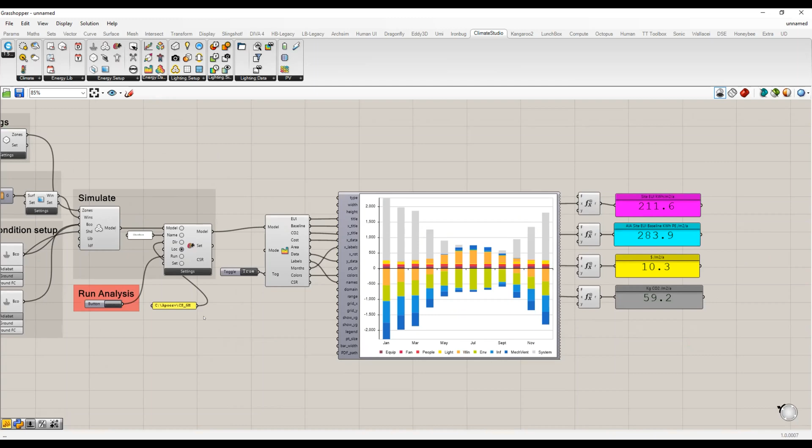The good part is that if you have provided a directory and a name, you can actually go back and load that same result file into Rhino and do the same exact analysis within Rhino as well, and do the comparative analysis and everything.

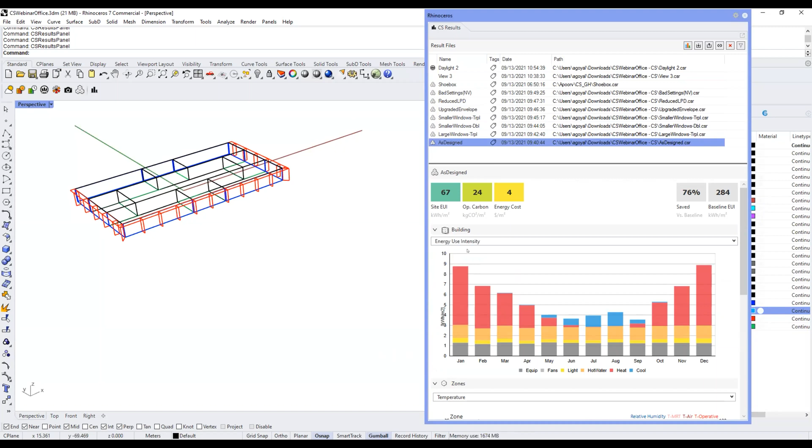Yeah, in terms of quality check and QC, use energy flows, use PNNL databases, and use logic to see whether the model you have defined is behaving in the way expected, because there's a lot of things that can break. Always see what you're defining.

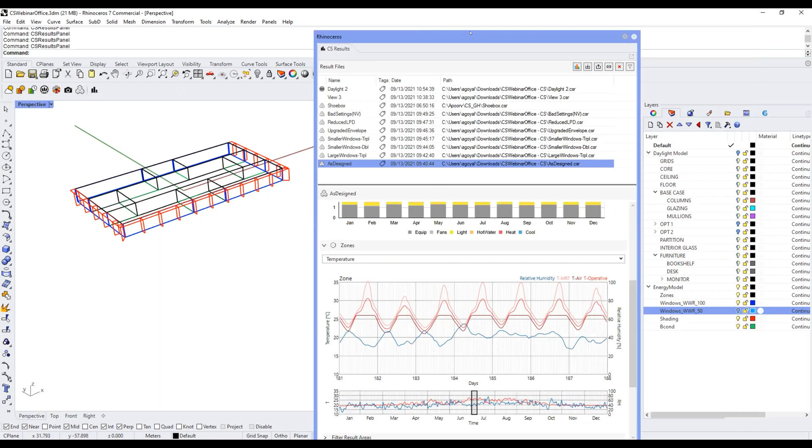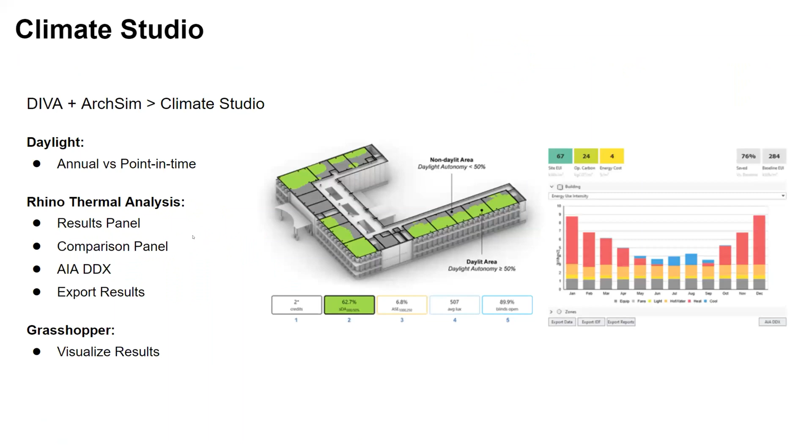Thank you for that. It was quite a robust presentation, or tool, I should say. I think that, yeah, clearly there's a lot you can do with that. I don't know how long you've been using it. I think it's a fairly new program, Climate Studio, is it not? It is. It's been around for a few months, I would say now. Again, in the previous life, DIVA and ArchSim used to be the components, and it's very similar, but now just packaged into one single thing, with a much more robust UI.

There is, I would say, a moderate learning curve to it. It's not very tricky. It's not eQuest, and it's not Sefaira, where it's a click of a button. So it's kind of somewhere in between, which I think is great, because you get to think about what you're doing before you can see anything.

Well, thanks. I think all three of those tools start to show some of the capabilities, the investigations that architects in particular can pursue, and again, the emphasis here is on comparative tools, manipulating the types of variables that architects are comfortable manipulating. Envelope, orientation, looking at daylighting, those types of qualitative and quantitative things that have a direct impact on our designs.

And I thank you all for highlighting some of the nature of the outputs and the linkages to the DDX. I think clearly we have to be a little bit skeptical, and I don't mean that in a negative way, of some of these comparative outputs. They are to be validated as we move forward, as we introduce systems into the project. We'll talk more next month about later phase validation, verification type energy modeling and the lessons from that.

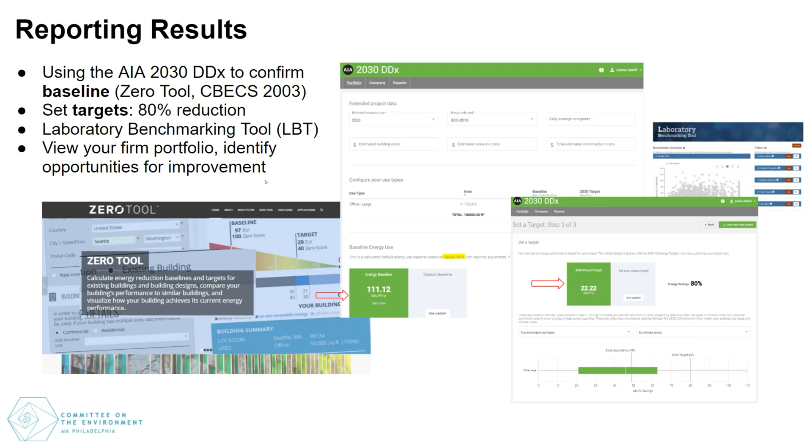And I think at that point, I would like to go to our questions, and I can pull up the chat. So Josh, there was a question that we started with, and Dan answered part of it, but for the rest of the audience, and so it's part of the recording, maybe we can have Dan talk a little bit about it. The question was, what benchmarks are the different tools using and how do they relate to 2030? And Dan responded about the benchmarking tool that the Sefaira tool is using and alternates, like you can set a different benchmarking tool. So Dan, can you talk a little bit about the difference between the two? Because I think this is a really important topic to discuss. And then maybe Sherman can chime in on the Cove tool side.

Yeah, definitely. So the way that it would work if you had the Revit or SketchUp plugin. So I showed that SketchUp plugin. And I'm tempted to share screen again, but I know we've got limited time here. Otherwise, I would totally do it.

You would go in, and it actually has preloaded in the SketchUp plugin a limited set of baseline assumptions. When you say my project's located in Boston or Indianapolis, wherever it is, it's also going to know where your climate zone is. And so when you pick one of the limited sets that they have, say ASHRAE 90.1 2013, it would pre-arrange these inputs in your model: your wall insulations, your roof insulations, solar heat gain coefficient for glazing, et cetera. It would set those to, at the risk of oversimplifying, essentially the equivalent of the ASHRAE 90.1 prescriptive path baseline assumptions, like minimums for your building. And you can change it then if you want.